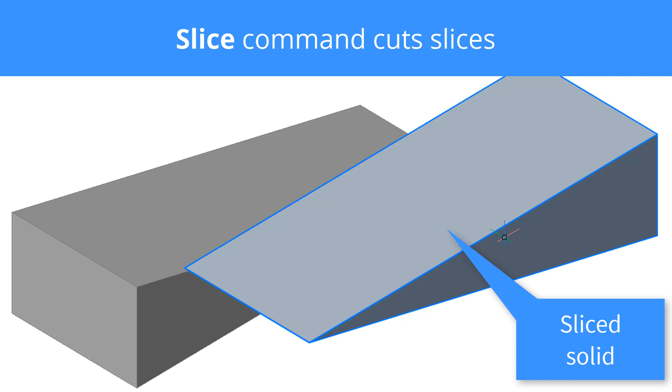There are ways to manipulate 3D solids through slicing them, sectioning them, and finding interferences. The slice command cuts 3D solids into two halves. The section command extracts a region like a slice of cheese. The intersect command finds the volume common to two sets of solids and extracts it as a single solid.

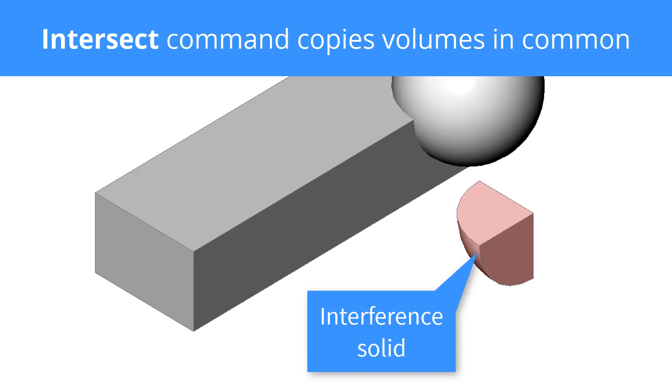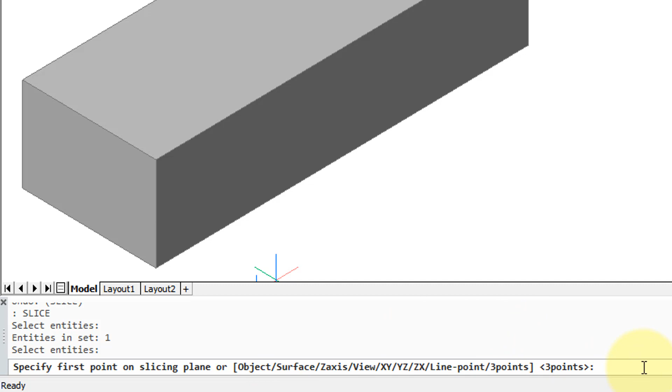To slice a 3D solid, I'm going to enter the slice command. It asks me to select entities, plural, which means you can slice more than one 3D solid at a time. So I've selected this box, pressed enter, and now it presents a whole bunch of options for defining the slicing plane. You can use an object, like a circle, an axis, or an XY plane, but I find the easiest is to specify 3 points, so I'm going to press enter to accept that default.

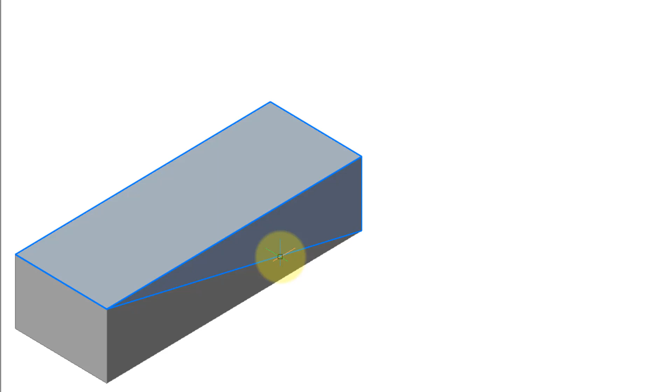It asks me for the first point, second point, and I'll stretch over here for the third one. Then it asks which half you'd want to save, and I always use both because if you don't want one, it's easier to just erase it later on. Now you can see the faint line of the slicing action. I'm going to move one away from the other, so you can see clearly they end up looking like slices of cheddar cheese. Both of them are still 3D solids.

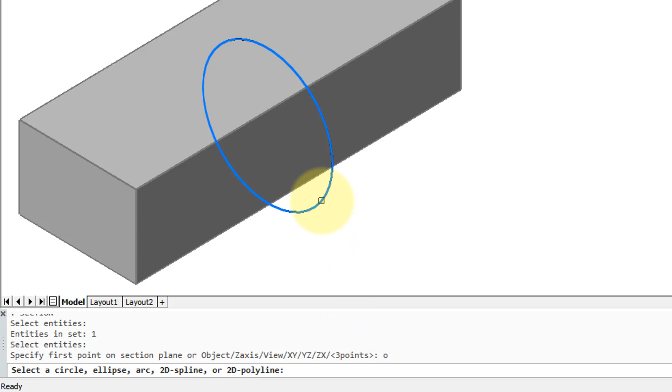The section command operates a lot like the slice command. It asks me to select one or more entities, but not just any entities, 3D solids. Then it's got the familiar prompt where I have to specify how the section plane will be defined. This time I've drawn a circle, and I'm going to use it to define the section plane. So I enter O for object, which says I can select a circle. I select the circle, and you can see the line from the sectioning that has gone on.

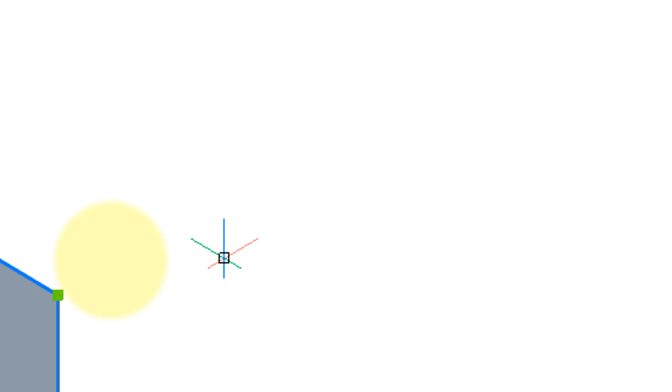I'm going to move the section. Which entity? The last one. Move it out over here so you can see it. When I click on it, you can see in properties that it is a region, and you can then manipulate it like any region, such as extrude it. And now it's once again a solid.

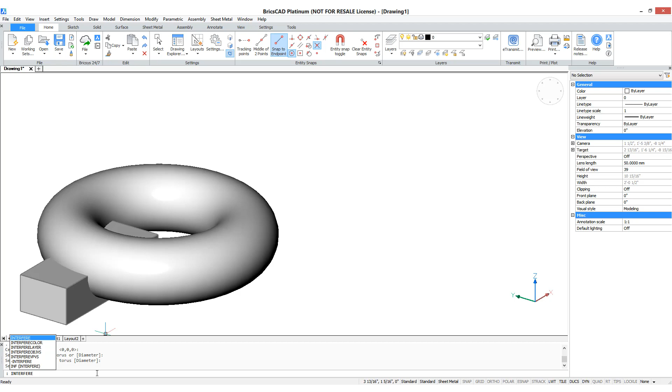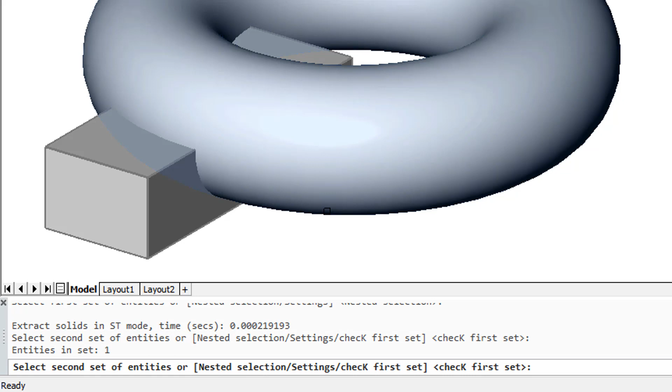The interfere command is good for finding where one solid intersects with another, such as in buildings or mechanical devices. Here I've entered interfere, and I've got a giant torus intersecting the box. It asks for the first set of entities, and you can select one or more; in this case it's one. Then it asks for the second set, and once again you can choose one or more. Press enter, and then it reports that it found one interference.

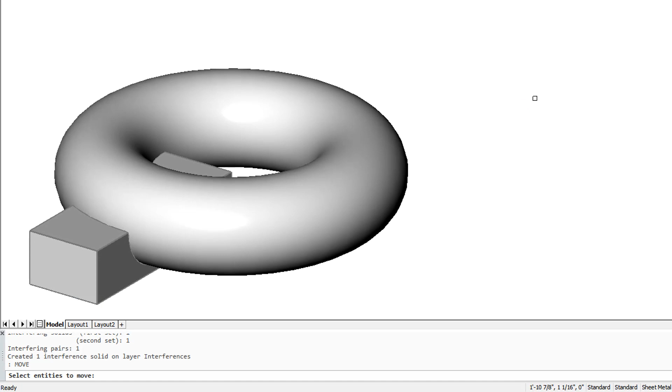Now, where is it? You can't see it because it's inside the model. There are a few ways to see it. One is to go to X-ray mode, and you can sort of make out something in there. Switch back to modeling. My favorite method is to use the move command and select the last entity created, so L, and then just move it out of there so you can see what it looks like.

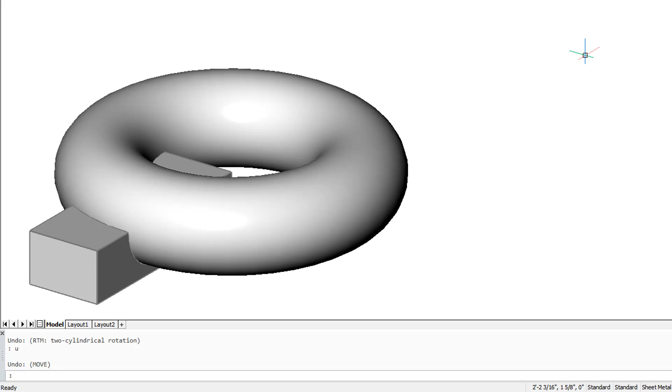Hold down the shift key and move the mouse around with the middle mouse button held down, and you can see what the interference entity looks like. Let's undo that. The third way is that you noticed it was a red color — that's because BricsCAD places it on its own layer named Interferences. Select the Interferences layer and then freeze layer 0, and now you can see it again. When you select it, you can see that it's a 3D solid, and then get the mass properties of it.